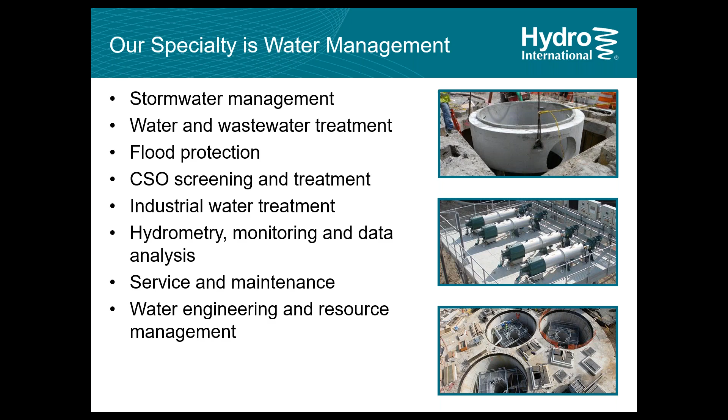Hydro is truly an international company. There are installations in 33 countries, offices around the world. I'm based out of this office in Portland, Maine. We have an office on the West Coast outside of Portland, Oregon. And the company headquarters is outside of Bristol, England, in the UK. But there are offices servicing all markets around the world.

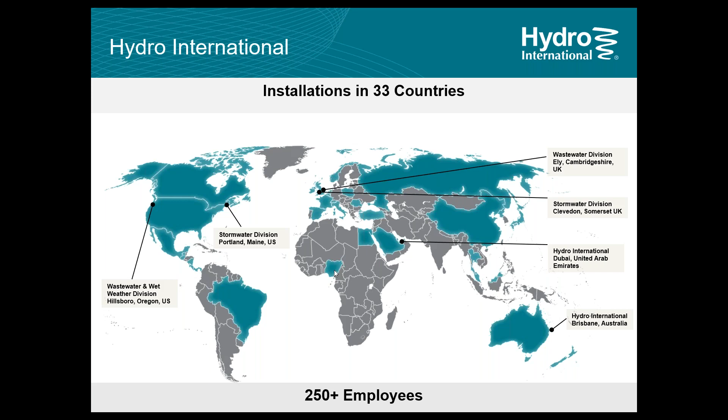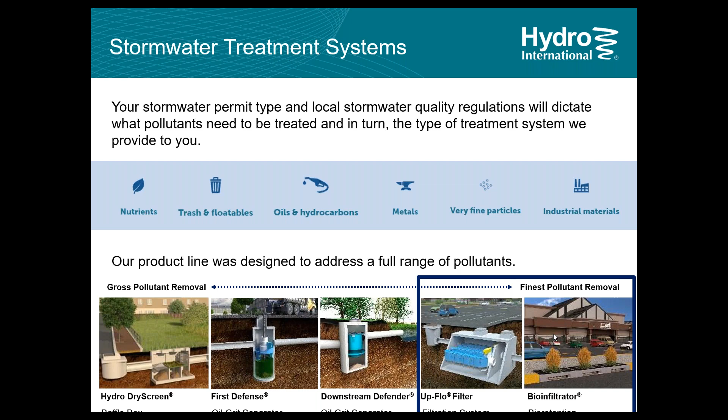So when I'm talking about a municipal application, what I'm really talking about is a filter application that is driven by development, usually in an MS4 community. So if you are in an MS4 city or town, and you are putting in a new parking lot or a new housing development or a new roadway, you are obligated to remove a certain amount of TSS, usually 80% TSS, as dictated by the EPA.

Now, as that has developed over time, what we've found is to get 80% TSS, we really need to start getting some fine material out of our runoff. And more people are requiring filter systems in order to get that 80% TSS removal. So this is municipal—it's really based on the certification of certain products or certain green infrastructure techniques in order to get 80% TSS.

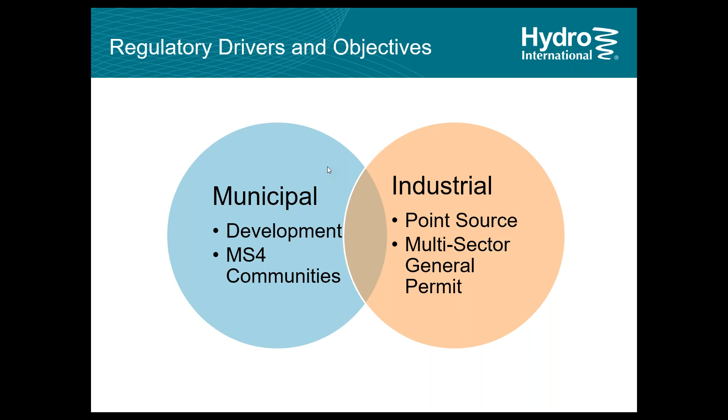For example, when you're talking about municipal programs, which is usually certifying a piece of equipment or a green infrastructure technique, you are looking at the result of a certification from a program. And the two longest standing certification programs right now are run by the New Jersey DEP and the Washington Department of Ecology.

They both certify BMPs for use, and because they are such long-standing programs, a lot of other states look to them for reciprocity and say, well, if it's good enough for NJDEP or it's good enough for Washington Ecology, it's good enough for us. Just to give you an idea of what they're looking for, New Jersey DEP is looking for 80% removal of TSS, and the DOE is looking for the same, plus some other removals.

What's worth noting is they are talking about percent removal in all of these cases, which is usually the way municipal regulations are written.

However, percent removal can be a tricky thing to evaluate. I don't know how many people on this webinar have ever checked out the International Stormwater BMP database, but if you haven't, it's a great place to go to understand better what the performance of all BMPs, filters included, can be.

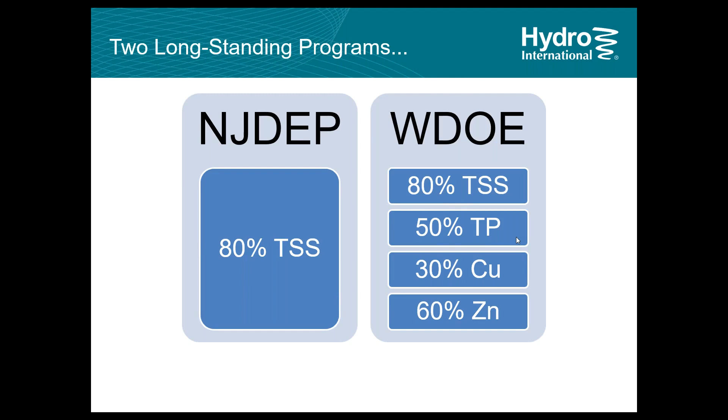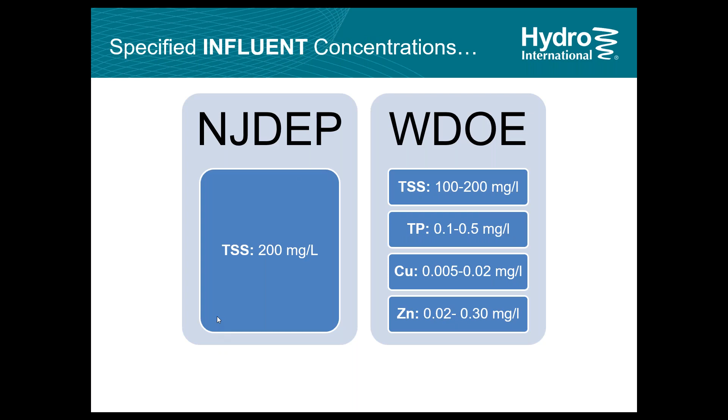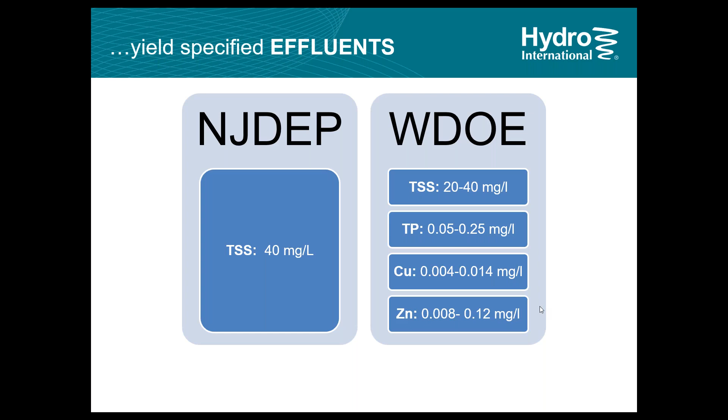So what does the International Stormwater BMP database do? They skip the whole step of looking at percent removals, and they just go right to effluent concentrations. At Hydro, we've really tried to use the same approach as what was used in the International BMP database when we're evaluating filter technologies, because we agree with them that percent removal is just too squirrely a figure to toss around. It's too dependent on your influent concentration.

So what they do is they use these kinds of plots that are called box whisker plots. I don't know how many people on this call have experience with this, but it's a great way to communicate a whole aggregate data set at once.

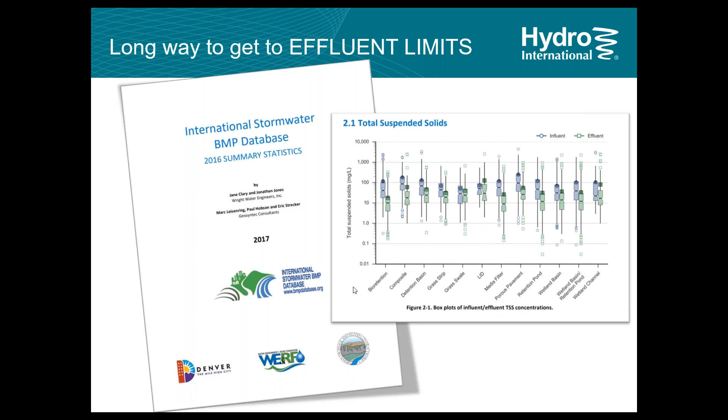So what I'm going to do here is I'm just going to zoom in on this first pair. This is looking at a bioretention system. So if we zoom in on this bioretention system, we can see this box and whisker plot. And I'll just explain quickly what we're looking at here. There's a table, a snip from that BMP database, that shows this is summarizing 25 BMPs sampled.

This blue one is the inlet, the influent concentrations. This green one here is the effluent concentrations. This box represents 50% of the samples that they received. The whole whisker here, that's all the samples. These little circles up here are outliers, statistically determined to be outliers.

And this waist on the bar here, that's the median. So that's a typical data point. And then this circle here, that's the average. So you can see the average has been drawn up by these outliers here. It's higher than the median. So it kind of gives you a sense of the skew of the data set.

So this is such a great way of looking at everything and making some judgment calls, not based on a single, perhaps cherry-picked example, or even the oversimplification of, well, this is what happened to the averages, or this is what happens to the median. It shows what happens to all the points in aggregate.

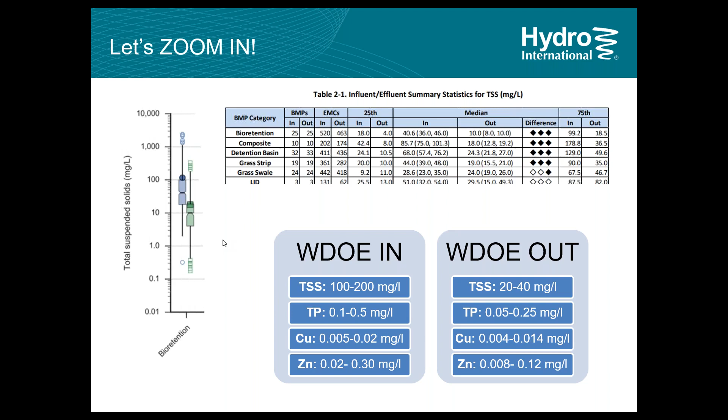A quick digression here. As I mentioned, New Jersey DEP is a lab-based protocol, and Washington DOE is a field-based protocol. Which one is better? You know, they all have pros and cons.

A lab-based certification, the nice thing about something that's done in the lab is it's repeatable. I can run a test today, and I'm going to get the same results if I run it tomorrow. It's scalable. I can set up another laboratory somewhere else and expect that I'm going to get the same results in one laboratory that I'm going to get in the other laboratory. It's faster. I don't have to wait for it to rain. I just turn on the pumps and away I go.

I'm wondering if I have a pointer here that's going to stay on. Oh, I do. Great.

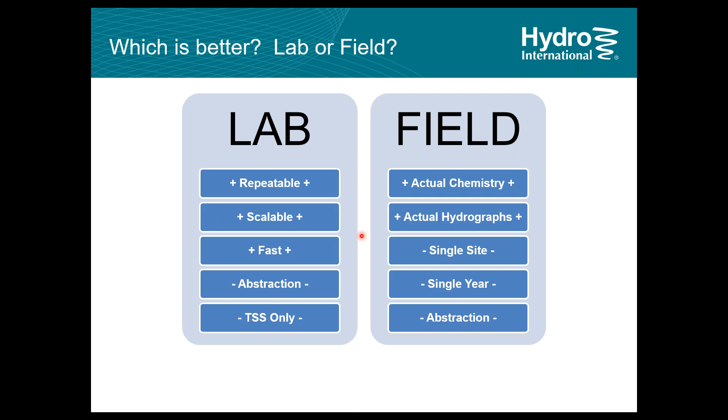So this is used for sites that are industrial sites, areas of environmental concern, or something like that. We pay very close attention to these because if we can meet these, we feel very confident that we can meet the municipal regulations as well.

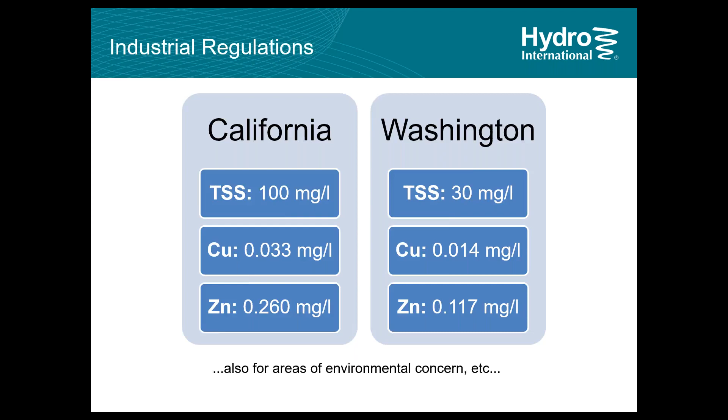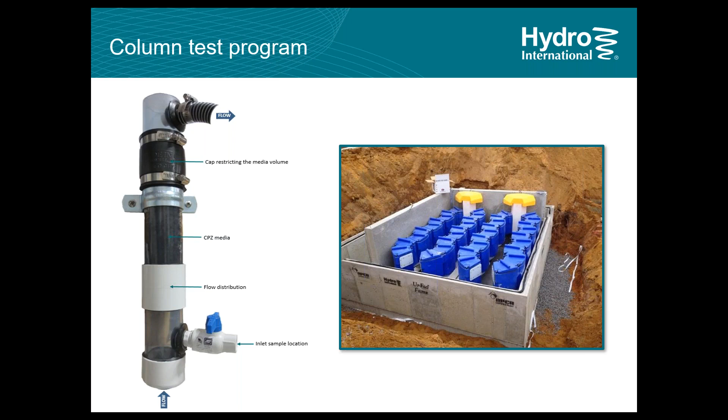So for example, these are results from column tests. We've got samples from all around the country that have been sent our way. These have gone through the column, but we don't stop there. We also put into this same database all of the samples that we've collected in the field from different applications that we've installed.

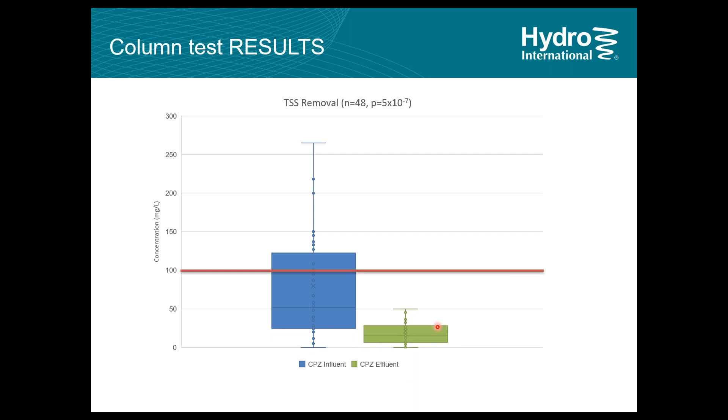Some people come to us and say, hey, we are looking for a product to help with that. We're pretty comfortable with our filter getting down below 50 milligrams per liter for TSS. And we have the same sort of data for copper removal, zinc removal. For you who like statistics, these are the p-values showing that these are statistically different data sets. So we are actually seeing reductions from the influent to the effluent. That's something else that the folks at the BMP database do.

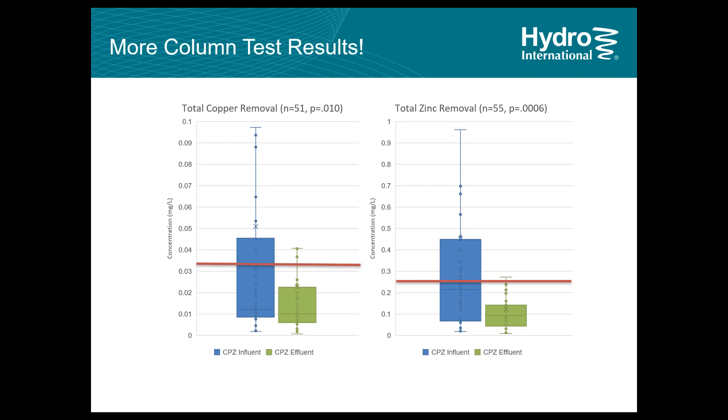But the other thing this lets us do is wisely choose what media we recommend in the application. The Up-Flo filter can be provided with either a granular media called CPZ, which is a blend of carbon, peat, and zeolite, or the other option, more of a membrane filter that is kind of a long ribbon suspended from the modules. These are two different media types that we can provide.

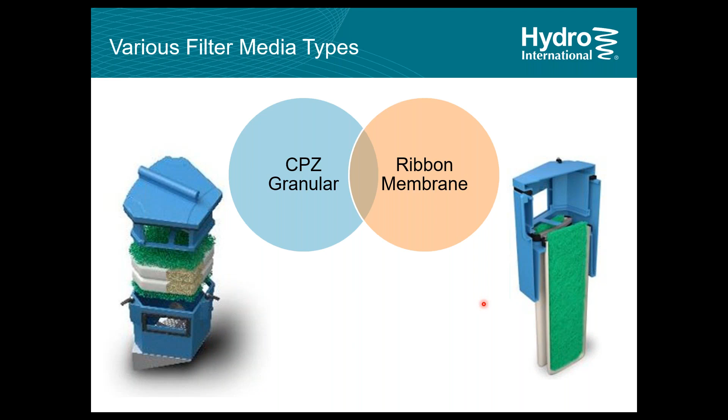And what's great is we're able to use our test to compare those two media types. So for example, these are TSS removal results from the CPZ filter, the granular media, and this one is for the ribbon. As you'll see further on through this presentation, even though we can get removals down below the NAL, the numeric action level in California, there are times where we actually want to reduce it even further. The ribbon membrane media can do that. The trade-off is it requires a little more maintenance, so we try to use the CPZ when possible.

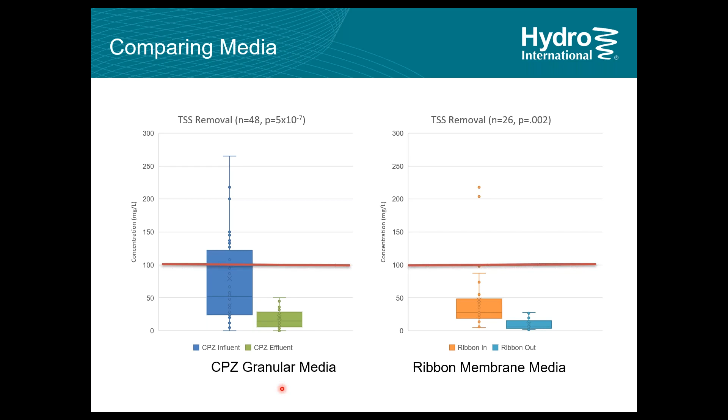So for our friends in California, they came to us with their qualifying sample, their bucket sample. We ran it through our column test, and you can see here the results for all the different chemicals, pollutants of concern. Red means it's over the limit and black means it's under the limit. We were able to reduce the TSS as we expected, but we still had elevated aluminum and iron.

Now, when we sent out these results to the lab, it came back that a lot of this aluminum and iron was in the particulate form. These metals can usually be separated into a dissolved fraction and a particulate fraction, and most of this was in the particulate form, which made us think that if we got this effluent concentration of TSS down lower, we would probably be able to reduce the aluminum and iron as well.

So we did another qualifying test, this time with the ribbon membrane filter media. When we did this, we got the TSS effluent down to 6 milligrams per liter, and that was enough to lower the aluminum and iron down to the limits that were required. Actually, even though the influents were a little higher than they were the first time around. So you can see those reductions here. So we said, great, and we worked with this client to get a filter installed on their site with ribbon membranes.

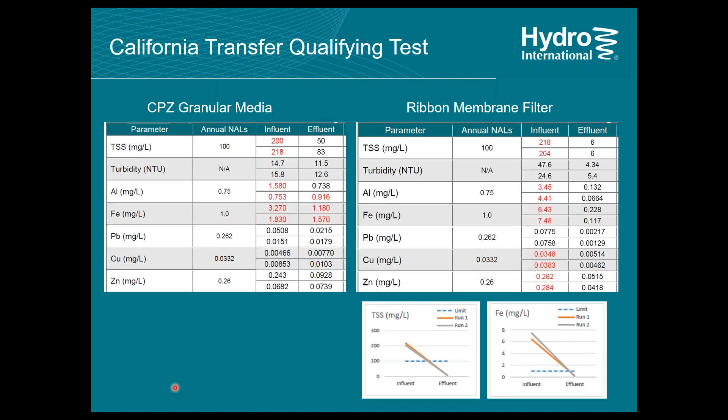Now, about 6 months later, we went out and did an inspection. As I mentioned before, Hydro has their own inspection and maintenance division. We maintain our own equipment, we maintain other people's equipment, we maintain green infrastructure. So we've got a wide base of knowledge for understanding what inspection and maintenance looks like.

The message here is all filters need inspection. Whether you have a manufactured filter or something that is green infrastructure, you really need to be keeping an eye on it to get it to do what you want, either hydraulically or for removal performance.

Now, in a municipal setting, usually those inspections are required by the permit. Whether they're actually carried out or not varies, but if you have an industrial permit, you really need to keep an even better eye on your maintenance, because you're going to be tested periodically.

And these are 2 CPZ media filter bags. You really want to be running a test with clean media instead of running a test with dirty media and possibly getting bad results.

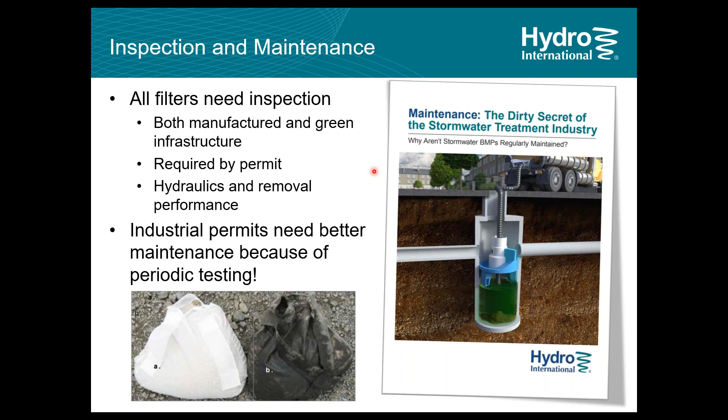If you're interested in finding out more about maintenance, our website has some great ebook references. This is one that was put together about maintenance, taking some of the lessons that we've learned from our maintenance division and getting them on paper. For example, this is just a piece from that ebook talking about what's involved with different kinds of maintenance, some price ranges, tools involved, a little bit of some lessons learned. So all these kinds of things are in guides like that, and we really encourage you to pick up one of those ebooks from the website.

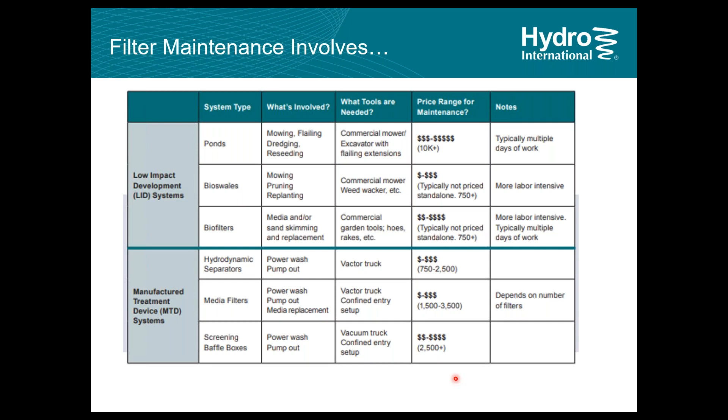So we went out to our friends at the California transfer station and did an inspection. And this is some of the photos from that inspection. What are we looking for here? Well, we're looking for buildup of sediment on the lids of the filter modules.

And we're looking at water lines, some high water lines. So it looks like here's one high water line. So the unit hasn't been topping this blue bypass component very much, if at all. You can see the water line here. That's sort of the standing water line where the water stays at dry conditions.

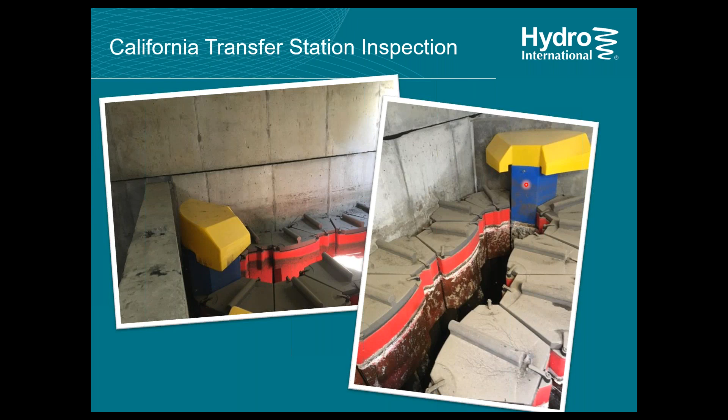So we're looking at this and we're saying, okay, probably needs some maintenance. And then we popped the lid and we looked inside this blue outlet module here. What we saw inside the modules was this fine material starting to collect. This is kind of a clay-like sludge material. We could see it inside those red modules as well.

This is all after the filter though, right? So post filtration, this sediment is collecting. This can only be removed with maintenance. And we know from our laboratory tests that we've run that our filter ribbons filter down to about 8 microns.

So that allows clay-sized material to pass through. And if enough of it passes through, and if enough of it settles out during low flow events, you're going to end up with some collecting downstream of the filters.

Eventually, if you get enough built up, it will mobilize and start affecting your effluent concentrations, your effluent pollutant concentrations. So another reason to stay on top of maintenance is you want to keep that fine material from collecting downstream.

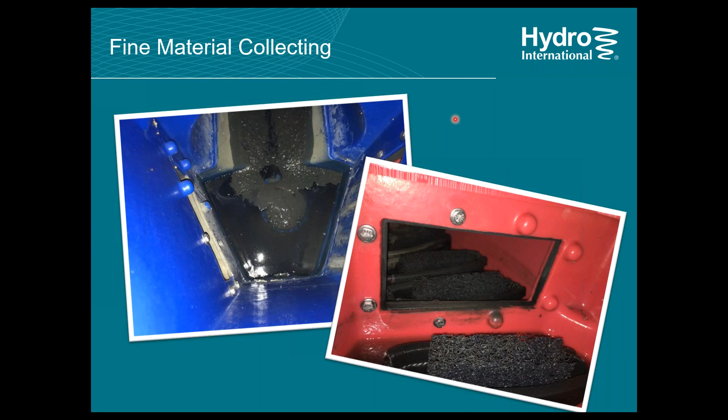If you're dealing with municipal filter applications, you probably are on a maintenance schedule like every 6 months or annually. If you are on an industrial permit, you need to take part in compliance testing, and that means quarterly sampling.

Now, there are a couple of different ways you can fail your quarterly sampling. One is taking your annual average and exceeding from your annual average. And the other is if you have a high enough instantaneous maximum, that means on one day, you can fail that way too. Those exceedance results are in the public record.

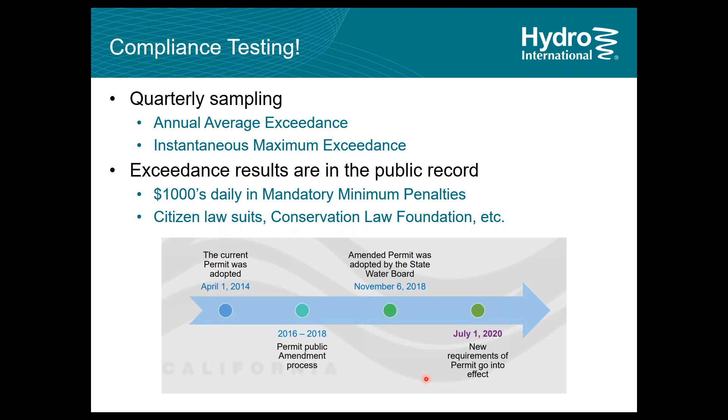If you are in California and you go to their website, it's called SMARTS. All of the people with permits are there, and all of their effluent records are there. So alongside fines from the state that you're in exceedance, you're also open to citizen lawsuits from your neighbors or from the Conservation Law Foundation or these sorts of things. These regulations are increasingly ratcheting up to more stringent qualifications. There's new ones going into effect this year. So, this is what you're looking at when you're trying to maintain those general permits.

So our friends in California did their quarterly sampling and sent the results to us asking, I don't know, Hydro, what do you make of this? Luckily, they took influent concentrations as well as effluent concentrations. This is a lesson learned that I'd recommend for anybody trying to evaluate their filter: you can take an effluent concentration and that gives you half the story. You should really take an influent concentration as well so you know what's going on. And these folks did that.

You can see here, copper was reduced from above the limit to below the limit. I've got influent concentrations here, effluent here, limit here. The zinc was reduced to near the limit - the limit's 260, we were at 280, then 260, so we're pretty close. Lead came in under the limit on the influent side, so we didn't have to worry about that. But same problem with TSS, aluminum, and iron - still a little high, coming in at 200 and we needed to be about 100.

Once again, though, we saw that these were related. The aluminum and the iron were mostly particulates. So there's something going on with the TSS here that we didn't fully understand.

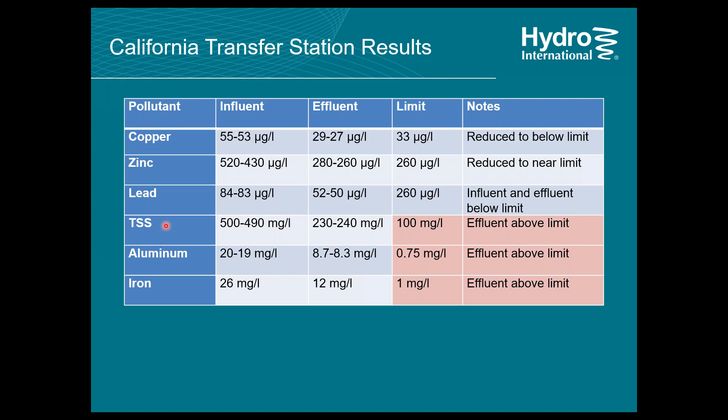This brings us to troubleshooting filters that are giving you a hard time. Hydro provides an inspection checklist with all of our filters so that you can run through these troubleshooting scenarios on your own. But these are the sorts of things you're looking at.

If you have a high influent concentration, take a look - some of this can be what's referred to as poor housekeeping. It's a bit of jargon, but if you can do some better street sweeping or better vacuuming, if that's possible, that takes a measurable load off your filter equipment.

If your effluent is starting to look a lot like your influent, you're probably looking at some seals that are leaking. If your effluent is higher than your influent, then you're looking at something called breakthrough.

If you think about what a filter is doing, it's essentially taking pollutants and concentrating them in a sequestered area, whether it's media or the surface of a membrane or something like this. It's concentrating and sequestering that pollutant. Eventually, that becomes saturated and starts exporting. If that happens, they call that breakthrough, and you need to change your media.

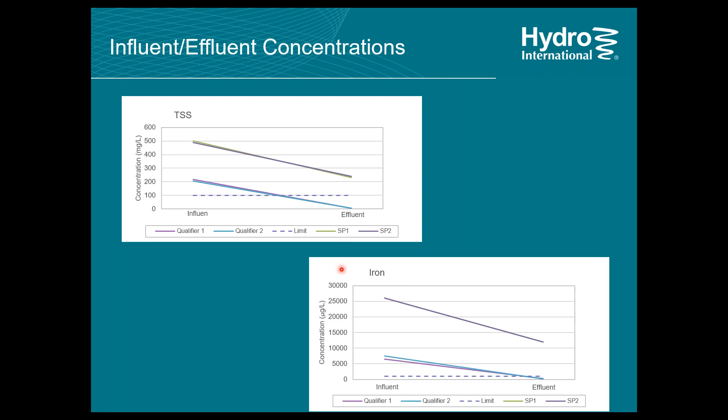The other thing we did when we were doing our inspection is we installed data loggers. These were level sensors that we put in that are attached to a cell signal. They report out once a day with what the water levels were instantaneously in the unit. I think they take measurements every minute or something like this, pretty fine resolution. This one happens to be manufactured by Hydro, but you can get them manufactured by lots of different people.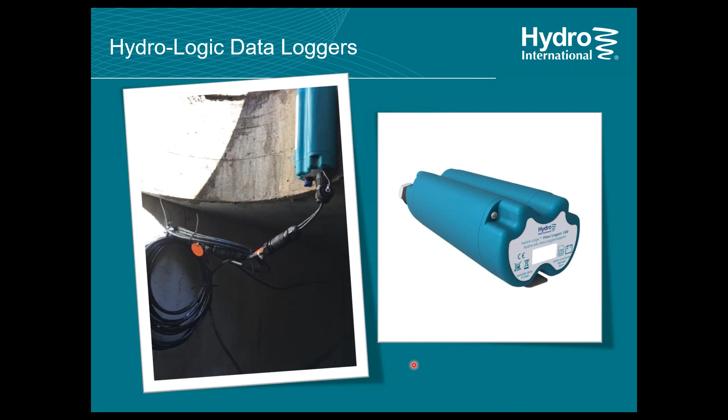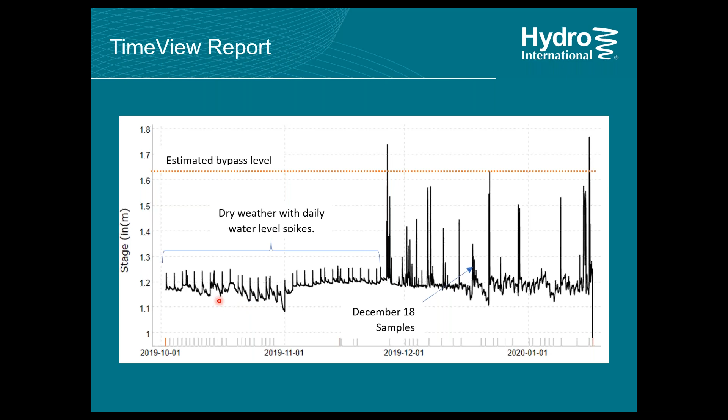Is that a good idea? Well, it's ultimately a decision for the transfer station, but it might require additional maintenance for them. So here's where our recommendations were, along with doing a full course of maintenance on the filter and setting up some quarterly inspections and a regular maintenance program. They may want to look at redirecting that operational wash water to a sanitary sewer, or plan on doing more frequent maintenance on their stormwater system. But without that level sensor installed, it would be very difficult to know that that runoff was finding its way to the filter on a daily basis.

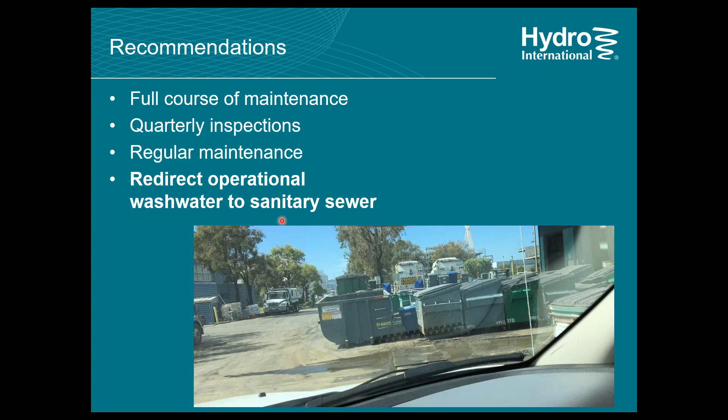What kind of preference would you give to a treatment system that had some real world performance data demonstrating its efficacy?

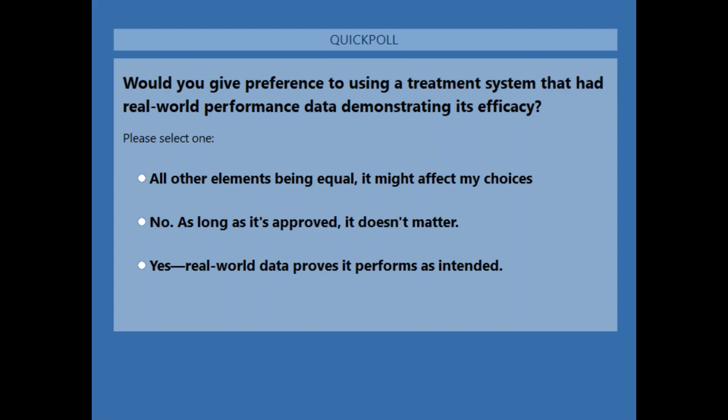Looks like the majority of you agree that real world data is a good approach for evaluating a filter. I think Hydro agrees with you there.

So when we looked at that troubleshooting chart here, it was clear to us that most of the problems that happen in a filter come from media exhaustion, media clogging, media breakthrough, things that could be stopped if maintenance cycles were extended. The more sediment that is collected in the system, the better and more reliable the system is going to be. So we thought, well, how can we extend those maintenance cycles to capture more pollutants?

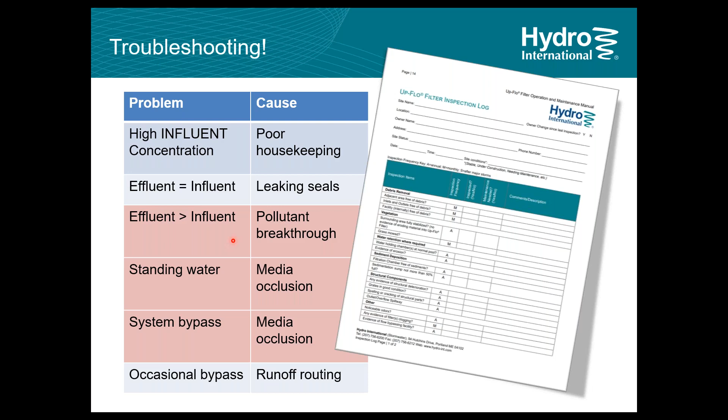And this is where our cross pollination between departments really came in handy. This is actually a product from our CSO treatment catalog. We have this product that has screens, conical screens that are backwashed with non-powered, gravity-fed, no moving parts way, where there's a backflush that cleans those screens periodically during a storm. And we thought, well, maybe we can do the same thing with our filter system.

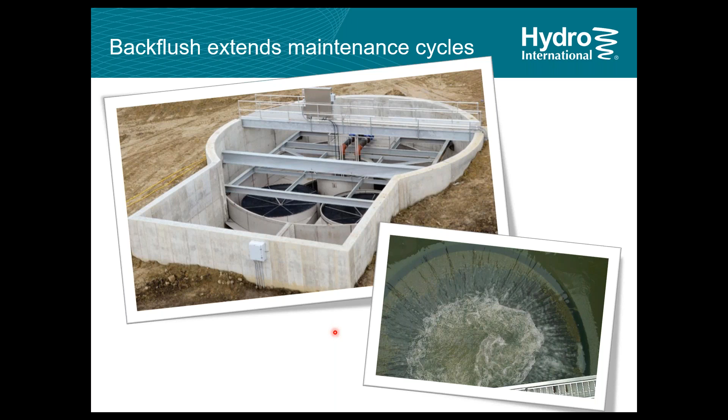And so that's what we've done. Now we have three different iterations of the Up-Flo filter. We still provide the CPZ granular system, and we still provide the ribbon membrane system. But we have a third system here where we've taken our ribbon membranes and installed them in a housing that has a power-free, no moving parts backflush process that washes the pollutants that have been collected on the surface of the filter off in between storms.

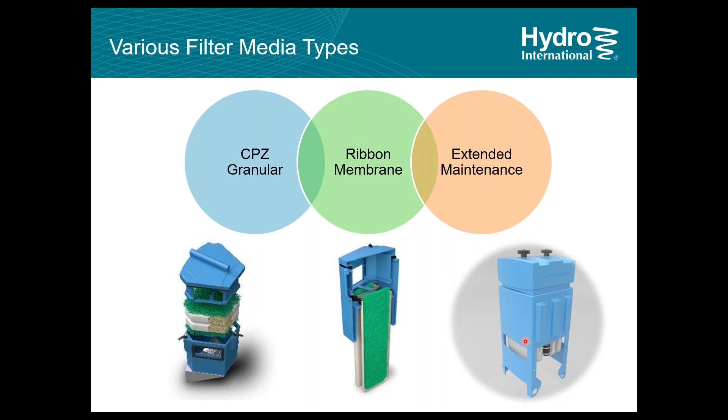Now I've got a video here. Let's see if I can make it work.

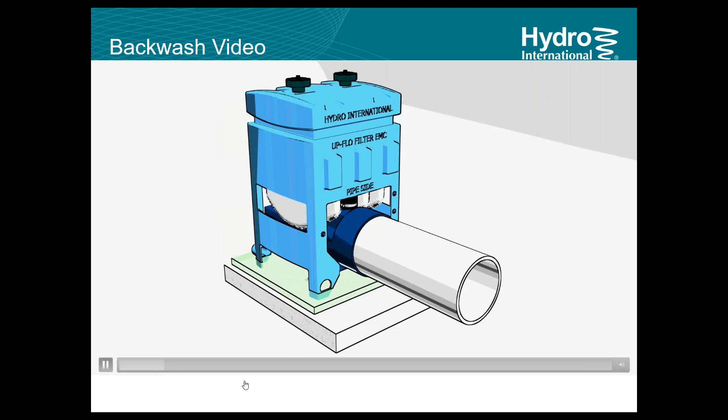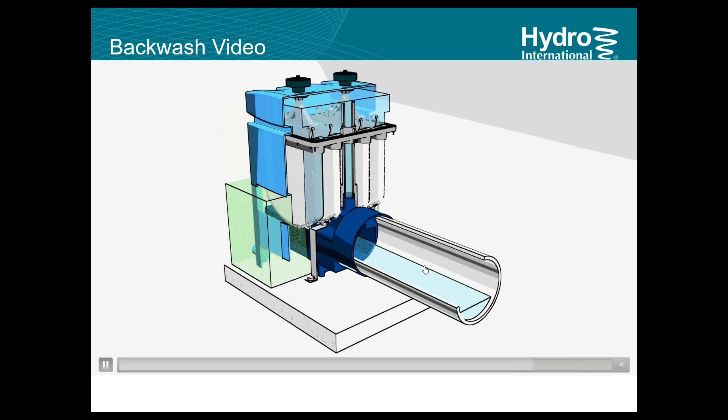Hopefully this will show for you folks. But this gives a sense of how this cartridge works. As the water level rises, it fills a reservoir at the top that holds some treated water. So now you've got water coming up through these filters, going into this treated water reservoir, and then exits the system. At the end of a storm, that treated water drops back through the ribbons, rinsing them clean.

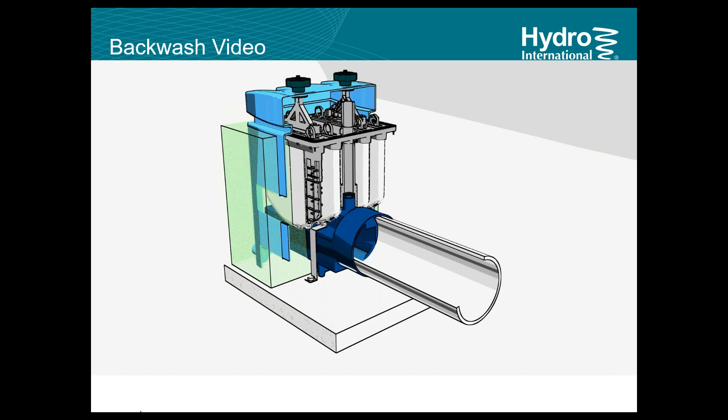But the real takeaway is how do we know that this can treat more sediment, more pollutants between maintenance cycles? There are a lot of different ways to evaluate this, but here's one way you can do yourself, using numbers that are publicly available. I took these numbers from our new Up-Flo filter with the extended maintenance cartridge, which was recently approved by the NJCAT program, the verification arm of the NJDEP certification program. These numbers are all available on the NJCAT website.

If you take our Up-Flo filter cartridges and compare them to the leading stormwater filter cartridge, comparing cartridges with the 27-inch drop, the first thing to notice is our cartridges are much smaller. We designed these cartridges to be 12-inch squares, one foot square, so they could be packed very economically into a filter vault. By comparison, the leading filter uses a 20-inch diameter round cartridge that can't be packed in quite so economically.

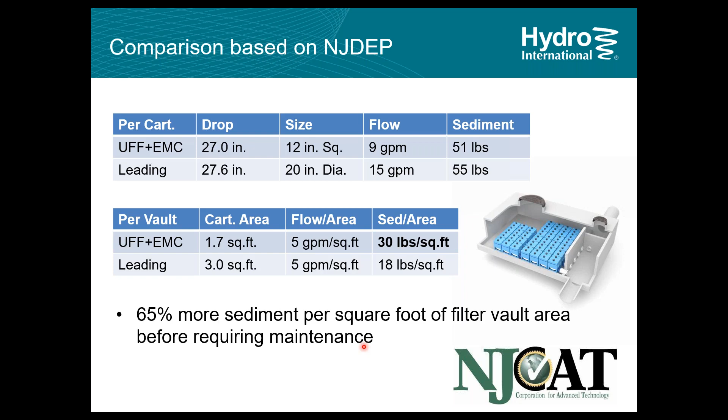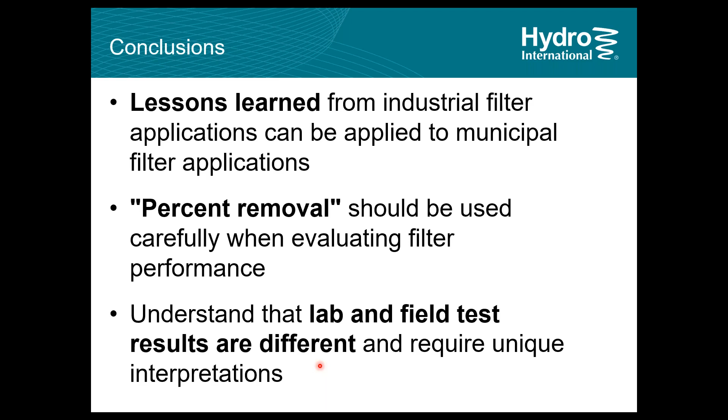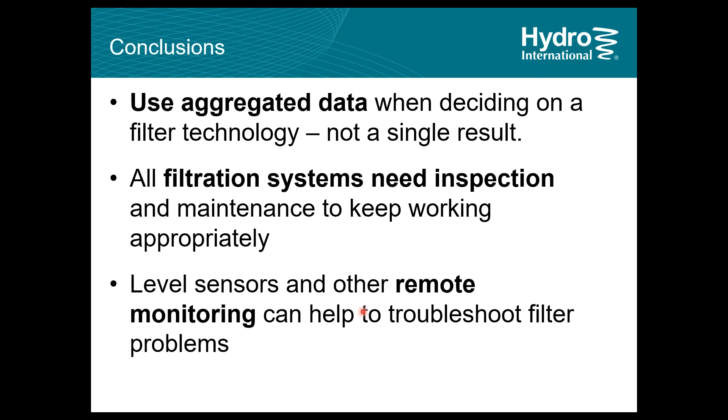If you're evaluating a filter, ask whether these are lab results or field results, and treat those appropriately, knowing that lab results are really only good for TSS removal, not for removal of metals or nutrients. You need field test data. Try to use aggregated data if you can. If somebody gives you one data point from one site or one test, that's great, but you really want to evaluate everything as an aggregate. All filter systems, whether manufactured, semi-manufactured, or green infrastructure, need inspection and maintenance to keep working properly. Remote monitoring systems, if you can get them specified, go a long way to making sure the systems are running properly.